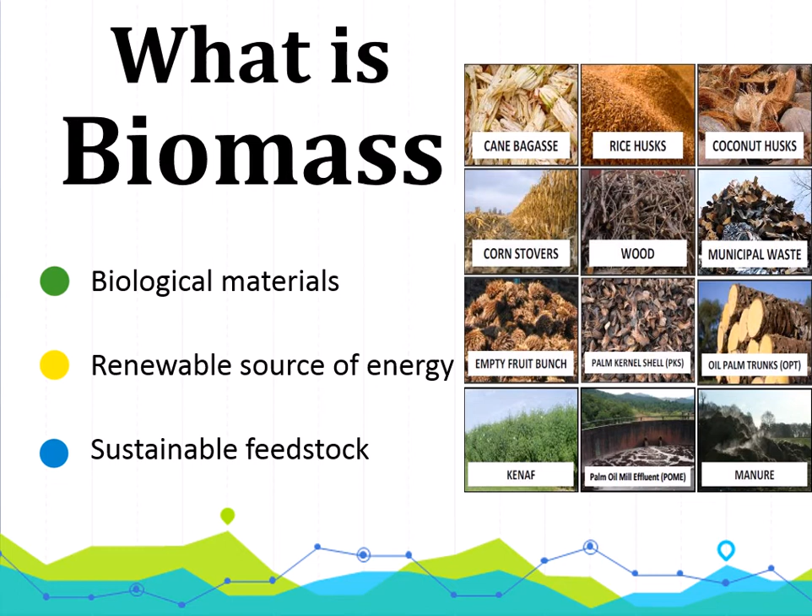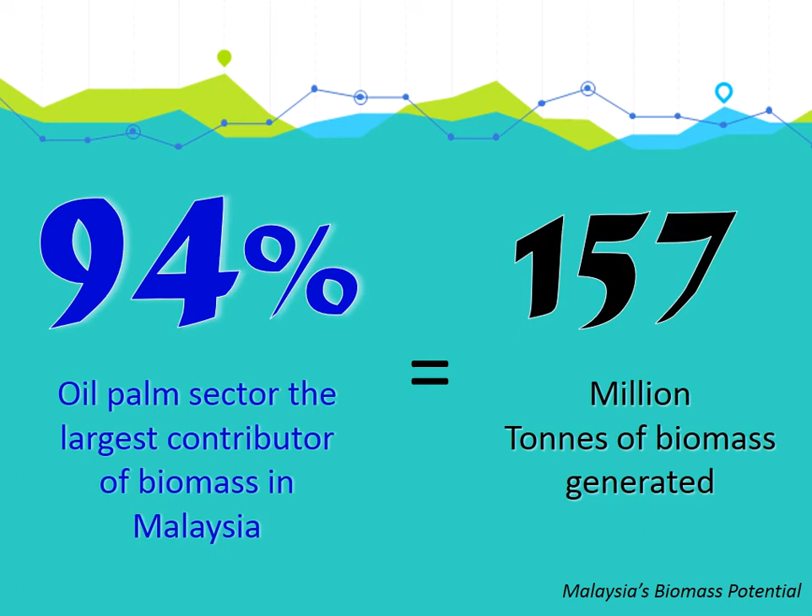So, 94% of oil palm sector, the largest contributor of biomass in Malaysia, the equivalent to 157 million tons of biomass generated. So these are the three biomass that I'm going to discuss in my project: the empty fruit bunch, mesocarp fiber,

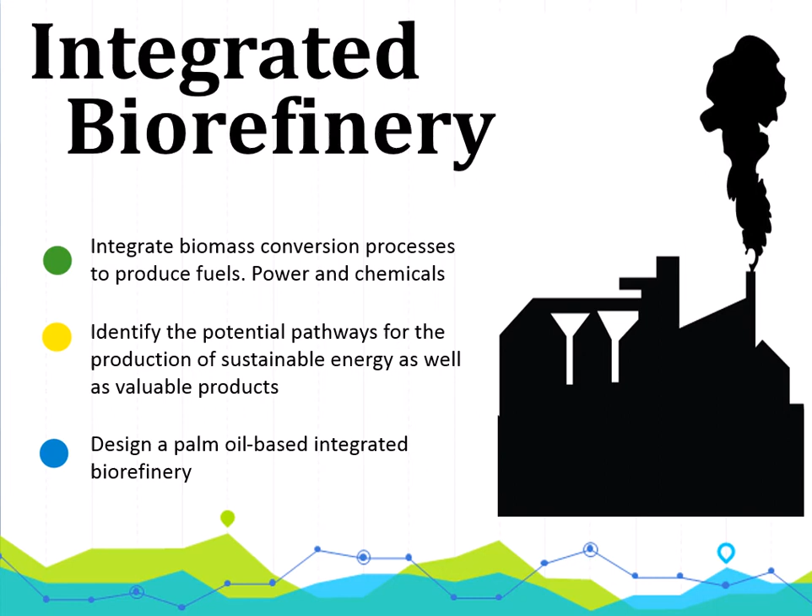palm kernel, and shell. So integrated biorefinery integrates biomass conversion process to produce fuel, power, and chemical, and identify the potential pathway for the production of sustainable energy as well as valuable product. Design the palm oil-based integrated biorefinery.

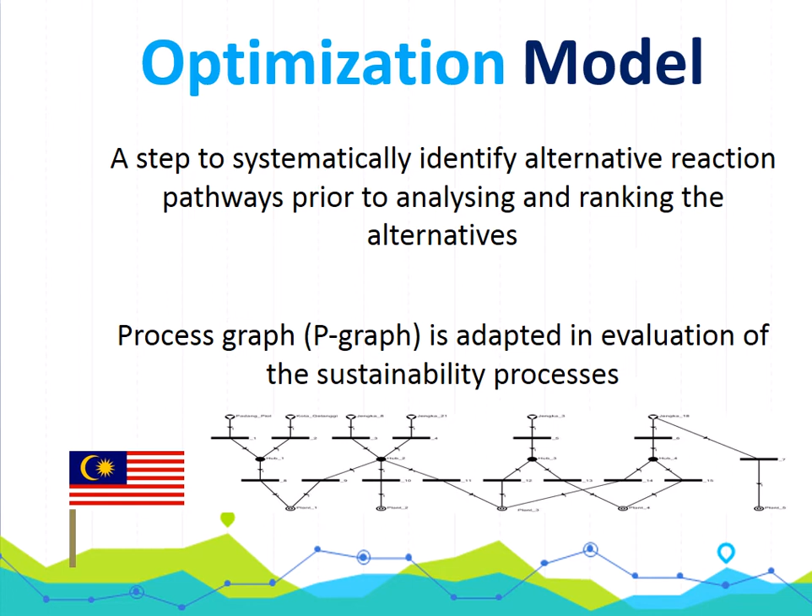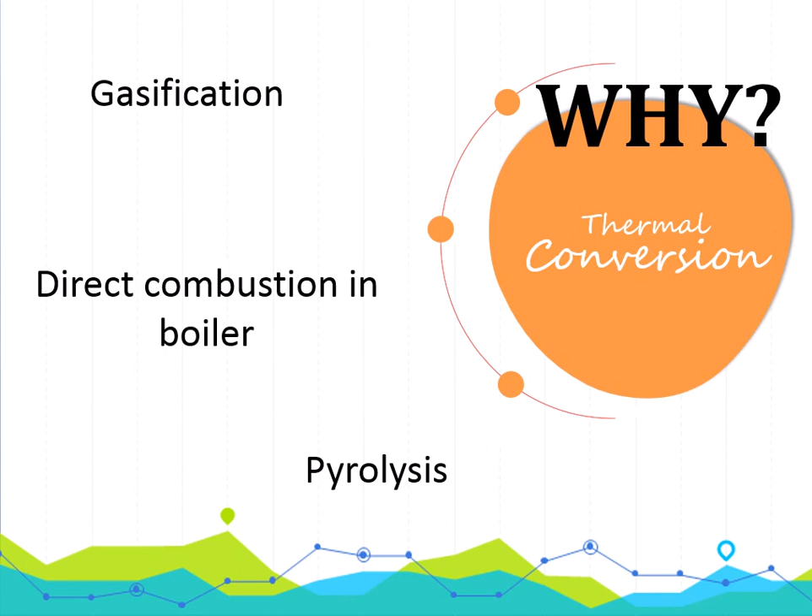So optimization model. This optimization is a step to systematically identify the alternative reaction pathway prior to analyzing and ranking the alternatives. This optimization model is adapted by process graph, that is a P-graph, in evaluation of the sustainability processes. So the technology that I use in this project to simulate biomass conversion: gasification, direct combustion in boiler, and pyrolysis.

So the problem statement. The problem of the palm oil-based integrated biorefinery is stated as follows. All sources are sent to a set of biomass conversion technology. The technology converts the sources to the intermediate product. So the intermediate product can be further converted to end product via final conversion technology.

Secondly, dictate the overall economic performance of the synthesized palm oil-based integrated biorefinery by keeping the environmental impact at a minimum. Thirdly, specify the potential factor of any environmental impact that is computed at the basis of per unit end product. That is the fraction conversion of source per technology.

So determine the total potential environmental impact score, which is to capture the carbon dioxide emission per technology. So adapted the benefits of process graph, that is a P-graph, to trade off between the optimization objectives, like I said earlier, to maximize the economic performance and minimize the environmental impact.

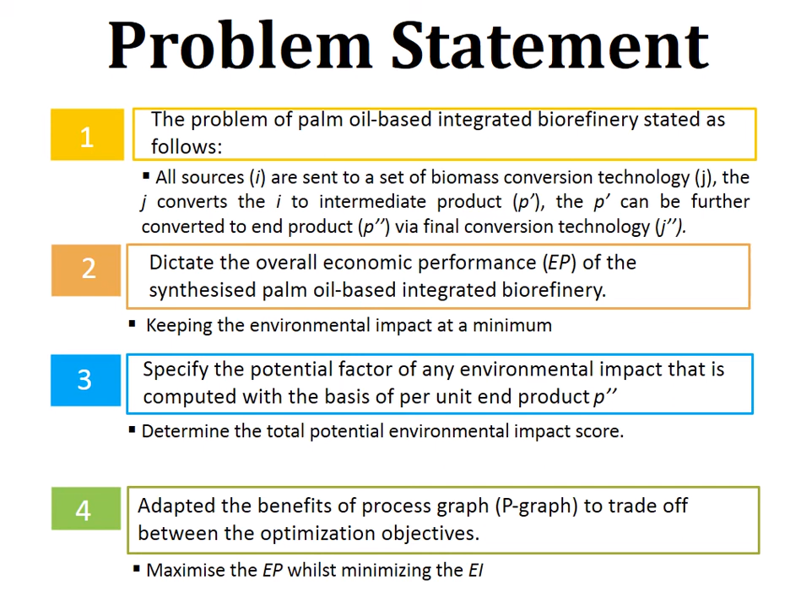So the objective of my project is examining the many different feasible pathways for producing energy and high-value products from biomass, which is PKS, EFB, and MF, that also maintain the balance in the nexus, which is the environmental. Secondly, to analyze the economic performance and the environmental impact of the palm oil-based integrated biorefinery.

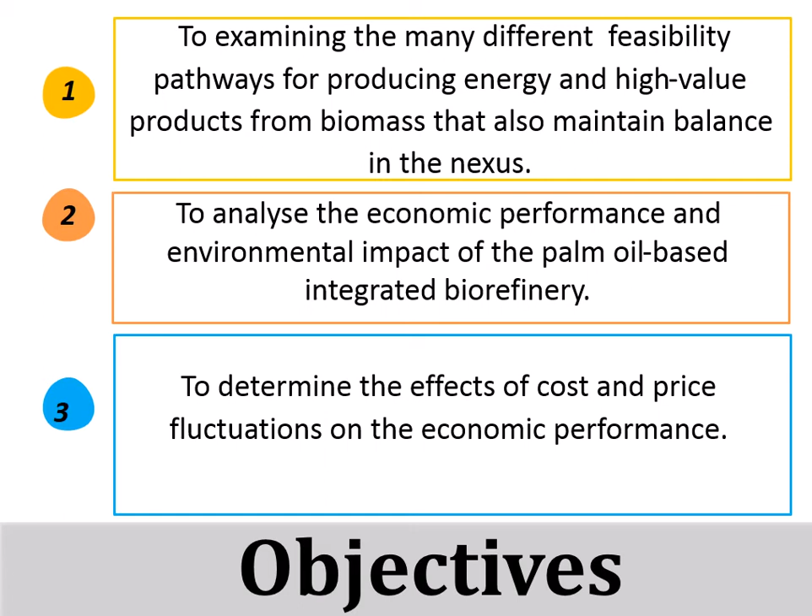So the following are the steps for the generation of the feasible process flow sheet for the palm base under consideration by deploying process network synthesis through thermal pathway for optimal integration of the sustainable technologies in palm-based conversion. So firstly, identification of the material and stream. This step produces the specification for the inputs and outputs from the system. So insert all the material and product.

So identification of the operating unit. This study was carried by inserting the required information of the operating unit, such as technologies used in the model. Like I said earlier, the technology that I use in this case study is the gasification, pyrolysis, and the boiler. So I have to input the annual capital cost for the technology, biomass, and the utilities amount required and conversion ratio of the intermediate product.

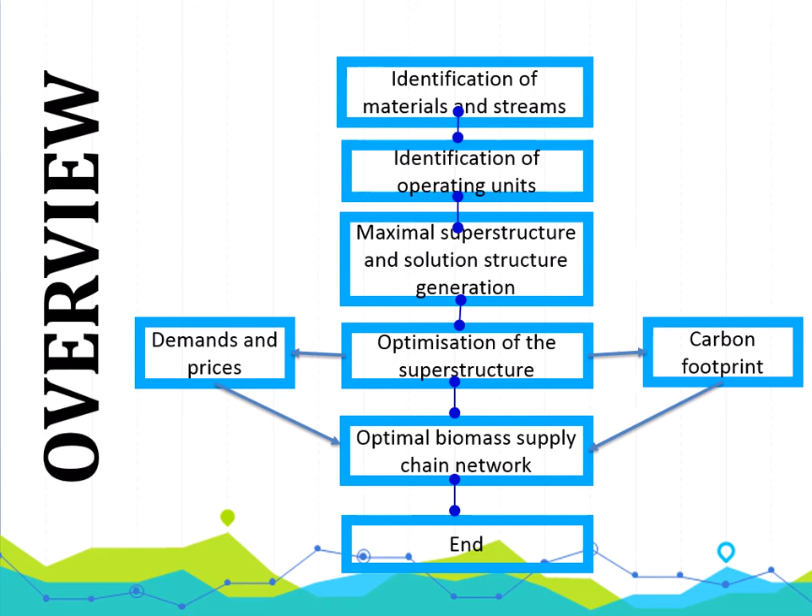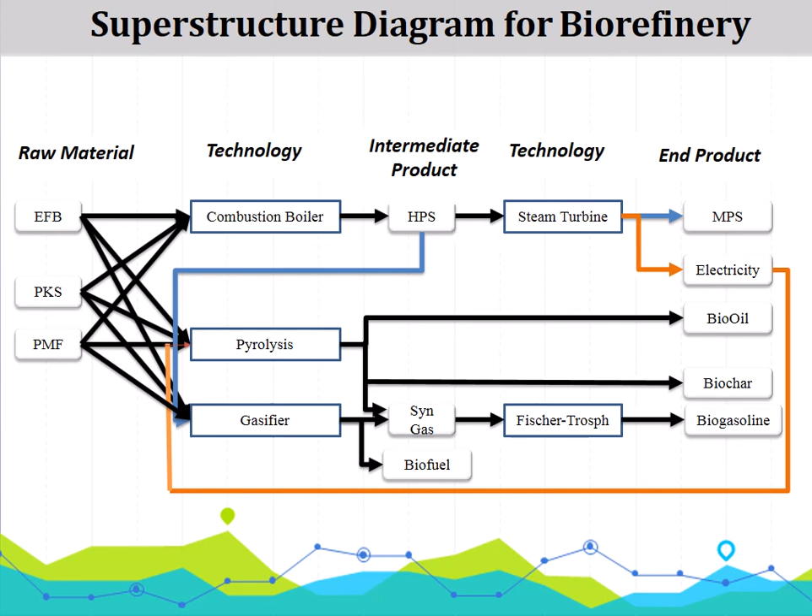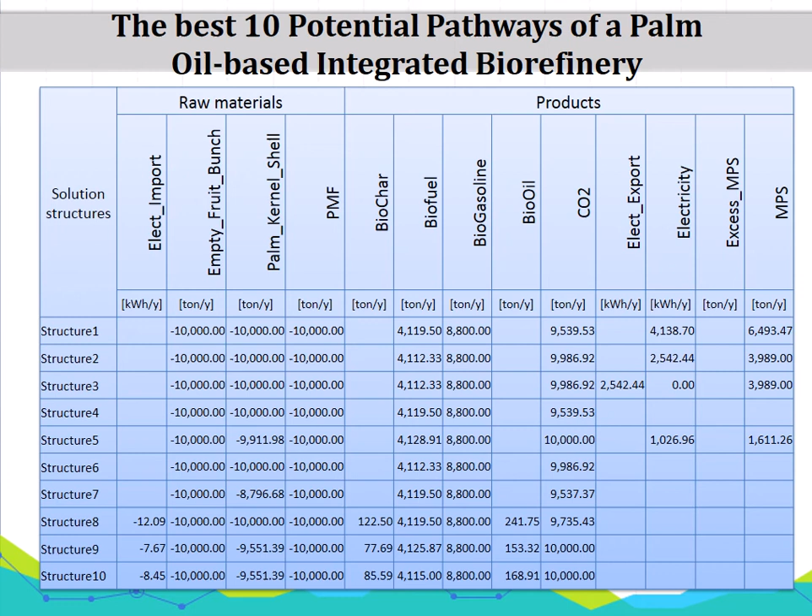So, results and discussion. From the P-graph, like I showed earlier, these are the best ten potential pathways of the palm oil-based integrated biorefinery, after I ran and simulated the program, the software. These show that the feasible structures are sorted according to the profit. So the highest profit would be structure 1, followed by structure 2, 3, until 10. So the highest profit here, we can see, is 28 million, followed by 27 million.

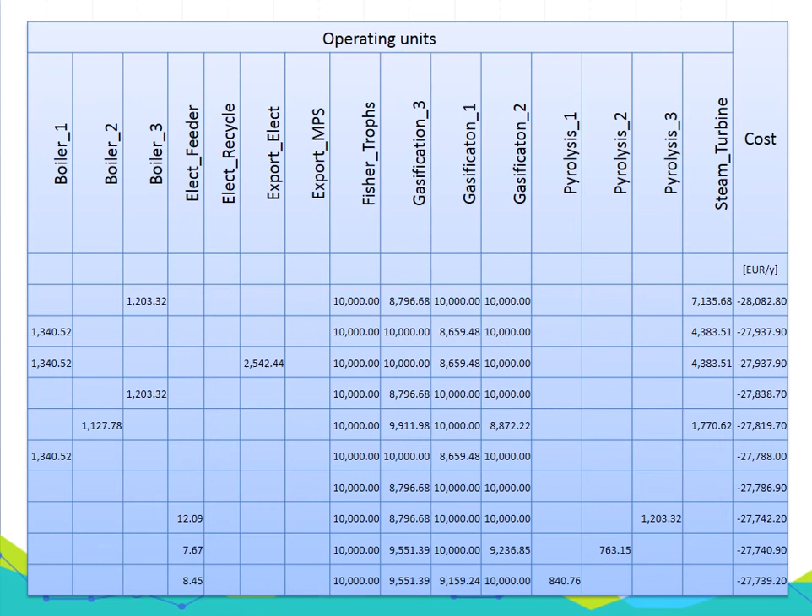So this is a column where I designed and analyzed from the best 10 feasible pathways, where I played around with the scenario where I design for the maximum economic performance. So feasible structure 1 was maximized with the proposed model and the optimal solution was obtained. The maximum economic performance of the selected pathway is estimated to be 28 million per year. Based on table 4 that I showed earlier, the total potential environmental impact was computed as 9,000 ton per year.

So the preliminary network for the palm oil-based integrated biorefinery for this scenario is portrayed in this diagram. EFB, PMF, and PKS went through the process of gasification, and the gasification process was selected in this scenario because the gasification process produced the high yield of profit, and the palm kernel shell was also selected through the boiler to produce the MPS and electricity.

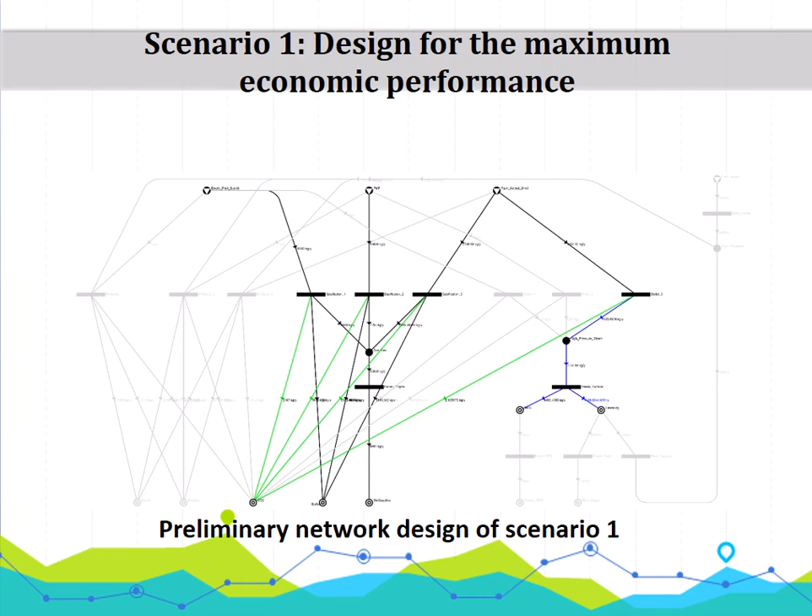For scenario 2, design for the minimum environmental impact, which means from among the feasible pathways, which pathway produces the minimum carbon dioxide emissions. So in this scenario, the model was minimized subject to the constraints and an optimal solution was obtained. So the solution structure was determined and the economic performance is estimated to be 25.9 million, while the environmental impact was determined as 5,000 ton per year, which means the carbon dioxide emission.

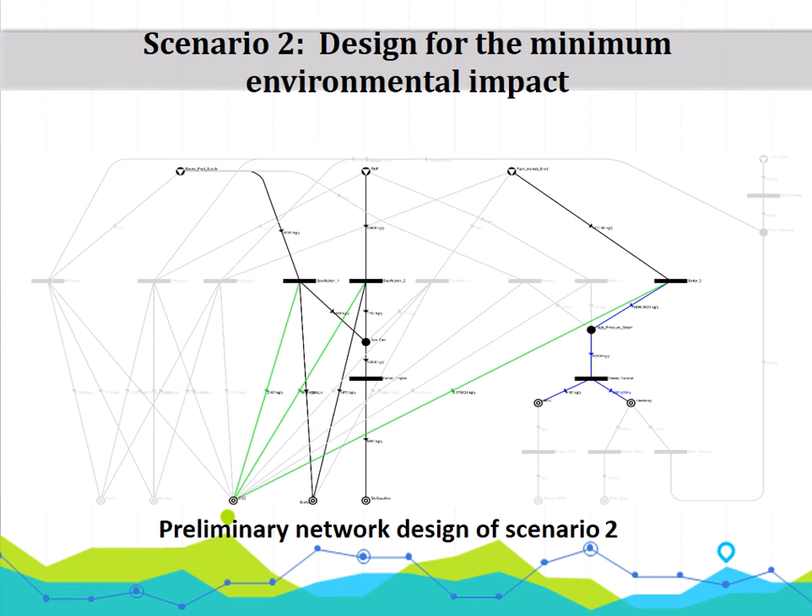So for scenario 3, design for the trade-off between maximum economic performance and minimum environmental impact. As you can see, scenarios 1 and 2 have evidently shown the competing behavior of the economic performance and the environmental impact in relation to each other. When EP is maximized, a high score of EI, the environmental impact, is obtained for scenario 1. Meanwhile, as shown in scenario 2, when environmental impact is minimized, relatively lower economic performance is achieved.

In order to address the two optimization objectives simultaneously, the process graph, that is P-graph, is adapted in this scenario. The upper and lower limits of the multiple objective function were first defined before the model was able to optimize. Scenario 1 provided the upper limit, whereas the lower limit was defined by scenario 2, as summarized in this preliminary network design for scenario 3.

So the proposed optimization model was maximized and determined an environmental impact for this scenario of 8,000 ton per year, which corresponds to the economic performance estimated to be 27 million per year. In this scenario, palm mesocarp fiber and palm kernel shell were split between two process units, which are gasification and pyrolysis, and a total of four main products: biochar, biofuel, bio-oil, and biogasoline were produced from the biomass.

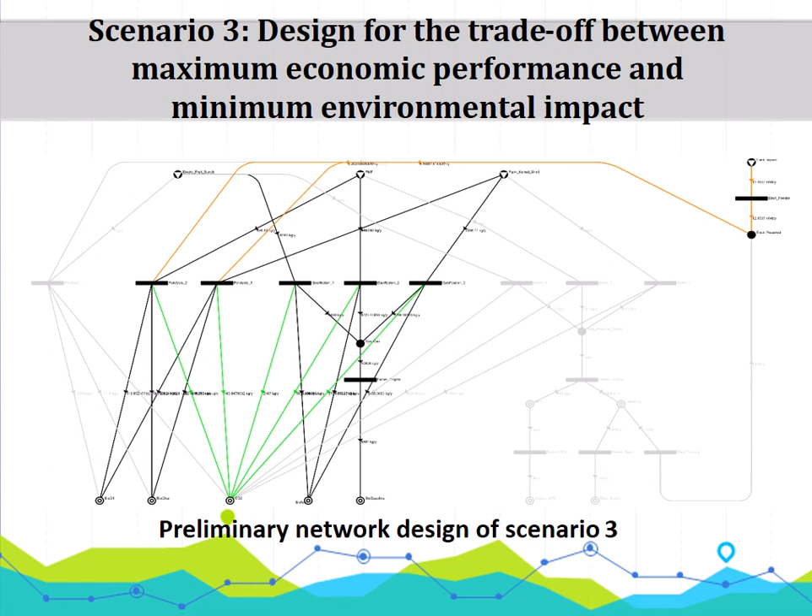But scenario 3 is a trade-off between the maximum economic performance and minimum environmental impact. So this scenario 3 is estimated that the economic performance obtained was 27 million, but the environmental impact

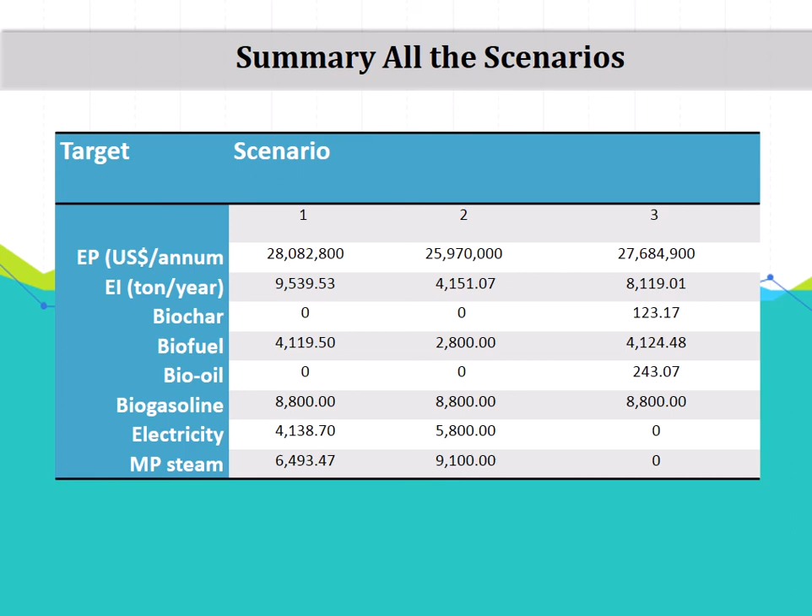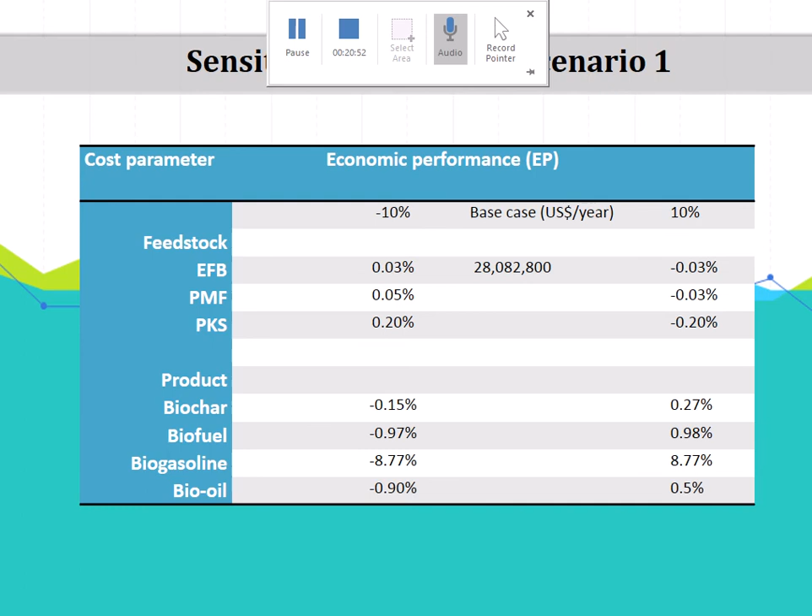So in this work, a sensitivity analysis was performed to determine the changes in economic performance of the synthesized network as a consequence of the fluctuation in cost of biomass feedstock and price of product at the rate of 10% based on scenario 1. The results of the sensitivity analysis are tabulated in this table, while the sensitivity graphs for the biomass feedstock and the product are shown in this graph. So back to here.

The 10% fluctuation in the price of the biomass feedstock imposed a slight impact on the EP in the range of 0.2%, where economic performance increases as the cost of the biomass feedstock reduces. Note also that the cost of the empty fruit bunch EFB and the PMF have minimal impact on the economic performance due to their low production in the palm oil mill. You can see from here 0.03% and PMF 0.05%.

Besides, a 0.2% fluctuation on the EP was observed as the cost of the PKS fluctuated in the range of 10%. In this case study, the cost of the PKS was seen to have the highest impact on the economic performance, that is 0.2%. On the other hand, the largest impact on the overall feasibility of the palm oil-based integrated biorefinery was the price of the biogasoline. A 10% increase in the biogasoline price contributed to an 8.77% increase in the economic performance.

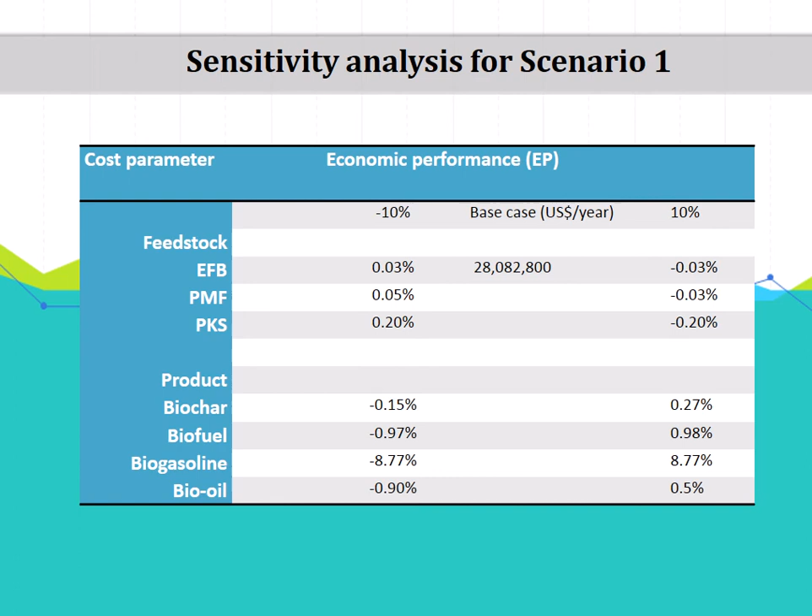Meanwhile, the product portfolio changed to produce more syngas, which is directly proportional to the production of biogasoline, because biogasoline is a product from the gasification process. Note that a decrease in the biogasoline price caused a higher flow rate of biomass to be sent to the boiler to produce more energy such as electricity and steam in order to maximize the economic performance. The 10% decrease in the price of biogasoline reduced the economic performance by 8.77%, as you can see from this graph.

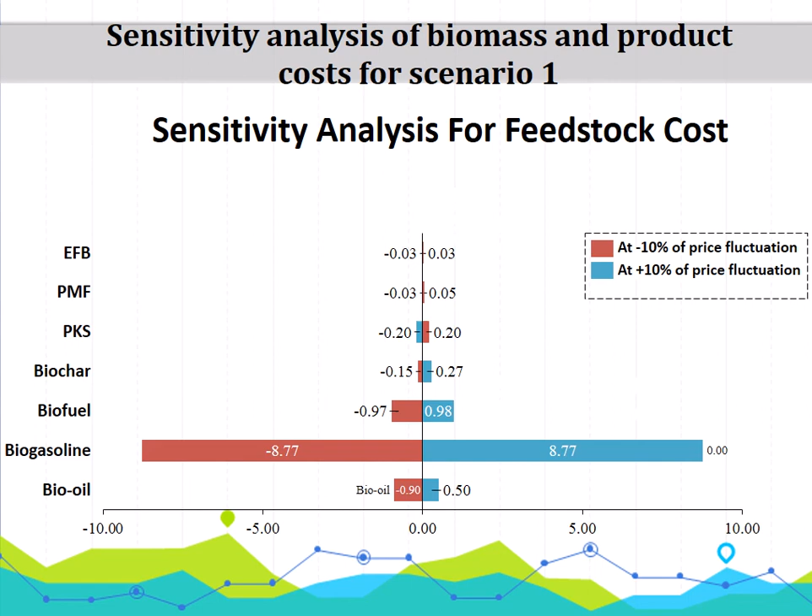So the price of the biogasoline played an important role in determining the overall economic feasibility of the palm oil-based biorefinery. Moreover, it's noted that biochar has no significant effect on the economic performance, which is 0.27%, as there is no fluctuation in the range of 10% seen in the price of the product.

So in conclusion, a novel application of the systematic optimization approach of the palm oil-based integrated biorefinery by process graph is presented. The process graph is adapted in this work to determine the potential pathway that achieves maximum economic performance with minimized environmental impact simultaneously. This also presents an optimization approach to design under uncertainties in the form of multiple feedstock supply and product demand scenarios. Process graph can effectively examine what-if scenarios and conduct sensitivity analysis.

As a recommendation in this project, the proposed approach can be easily devised and formulated to handle the possible uncertainties that can arise from the advancement of technologies and market price. The process graph can be further supplemented by mathematical programming.